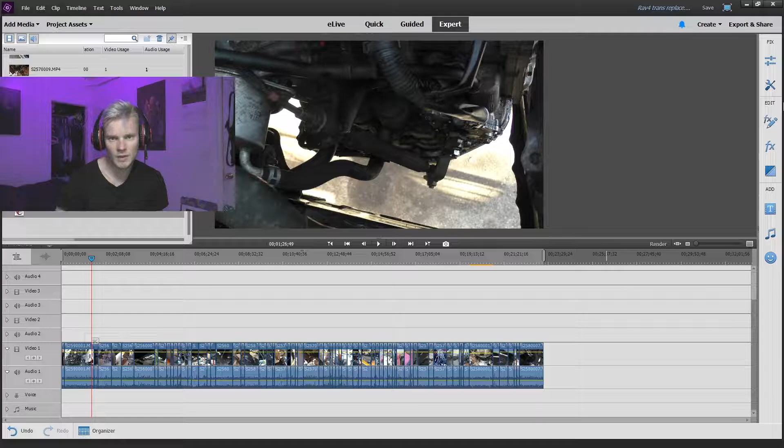So I'm going to be showing you how to replace the transmission. This is a 2008 Rav4. It's the 4-cylinder with the 2AZ-FE, the 2.4 liter, and mine is the 4-wheel drive version. So the reason I'm making an intro to this video is because I ran into some weird things because mine is 4-wheel drive, and I wanted to share those with you. You should definitely watch this before you just start taking your transmission out, because I actually wouldn't have even had to take my transmission out.

Anyway, what started to happen was it started to shift really rough, going from first to second and going from second to third. I want to say it was worse going from second to third. I can't remember. Can't be completely sure, but I think that was it. And it would only do it when the transmission got hot. When it was cold, it wouldn't really do it.

And I took it to a transmission repair shop. He drove it a little bit. He was like, yeah, for sure, it's a bad solenoid. I see it in these transmissions. This is what happens with them. I was talking about it to the place that I bought the transmission and the engine from for this, and he was like, yeah, if it's a problem going from second to third gear, it's the transmission. The transmission's bad.

So anyway, mine just had a bad solenoid, and what you actually can do if your solenoid is bad is you can just take the whole valve body. The valve body is the thing that's right underneath where the oil pan is on the bottom of the transmission, and there's going to be this big filter, and then the valve body is right under that. You can't just replace one solenoid. You want to replace the whole valve body.

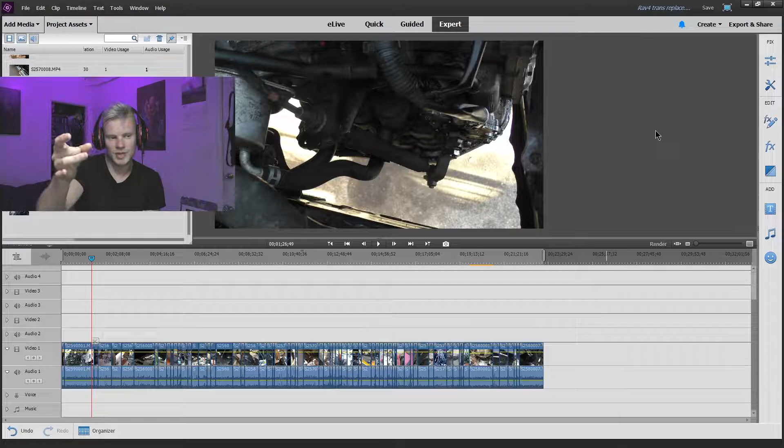And if the new valve body you put in doesn't work, you're going to have to reprogram the TCM, the transmission control module. But there's a little number stamped on the bottom of the valve body, I think the guy showed me, and if those match up, you should be fine. With mine, we just swapped in the other valve body and it just worked. We didn't have to reprogram the TCM or anything like that.

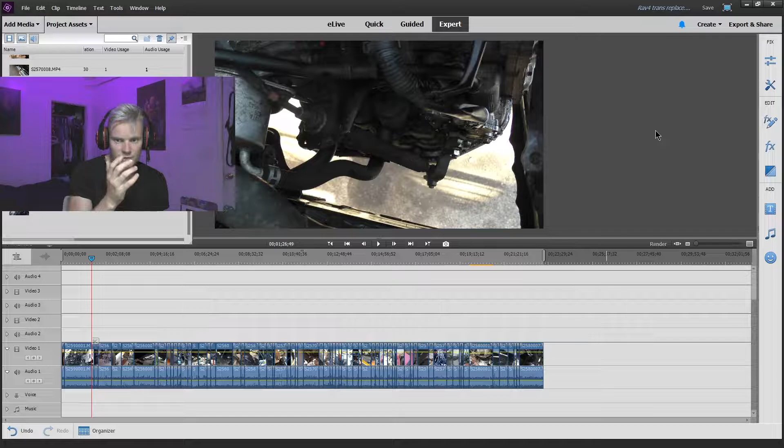But the reason we ended up swapping over the valve body was because the 4-wheel drive transmissions for the 4-cylinder are extremely expensive. I think they're just very rare. You'll spend like $1,700 for one that has way over 100,000 miles. The prices are ridiculous for these.

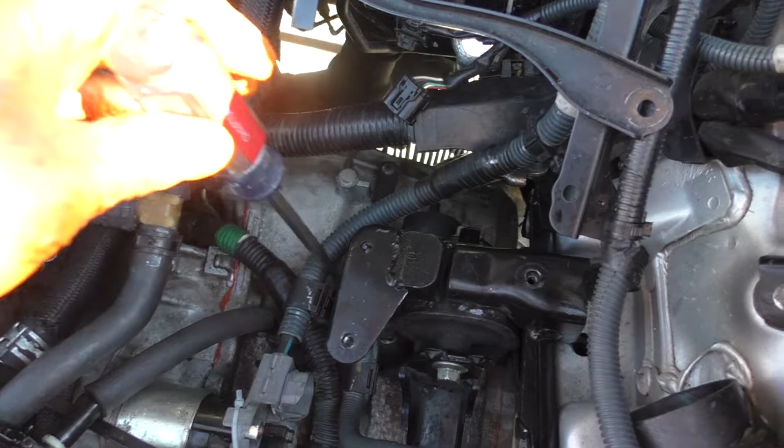This bolt here for this bracket holding on this. There's a little plastic clip that goes into this thing here on the dipstick. There's a bolt here holding in the dipstick. You just pull the dipstick out, and there's this going to the speed sensor, and these two parts of the wiring harness down here. And then there's two 12s holding on this bracket for the shift selector. You can just remove this 12mm bolt here, remove the shift selector.

There's two 12s here holding on the transmission cooler. There's one 12 back here holding on another bracket for the shift selector. And then there's just these two hoses down here. You can access them easier from the bottom. You need a couple clamps. You just pop those off the transmission going from the transmission cooler. And that's pretty much everything you need to remove up here on the top part of the transmission.

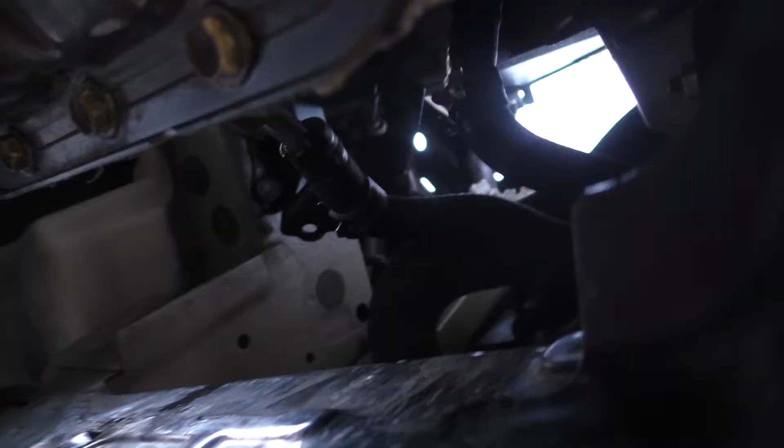Drain the transmission fluid and the front diff fluid right here. I think they call it the transfer case or something like that. I can't remember. So you've got to remove the axles on both sides. I haven't gotten the axles out yet, but I removed the wheels. Remove these bolts here.

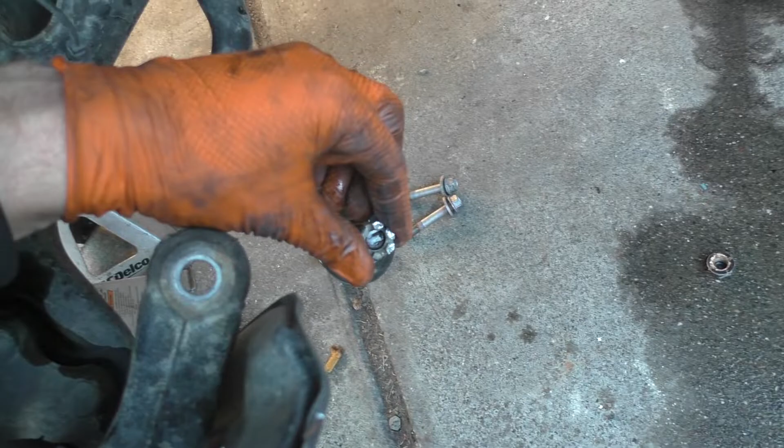Remove the ABS sensor, and you remove the brakes. Obviously I got the brakes just tied up here to the suspension. And then you have to remove the whole subframe. So you remove these. Basically you just pop this off. There's going to be a cotter pin you have to pull out, and then I just put this bolt down so the top of the bolt was flush with that, and whack it real hard with a hammer.

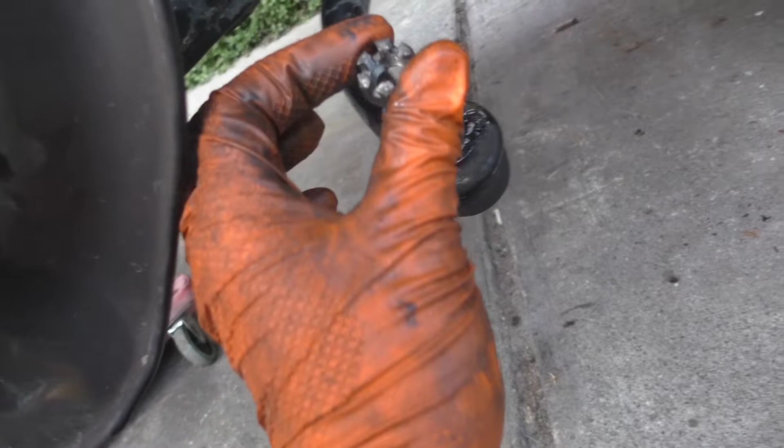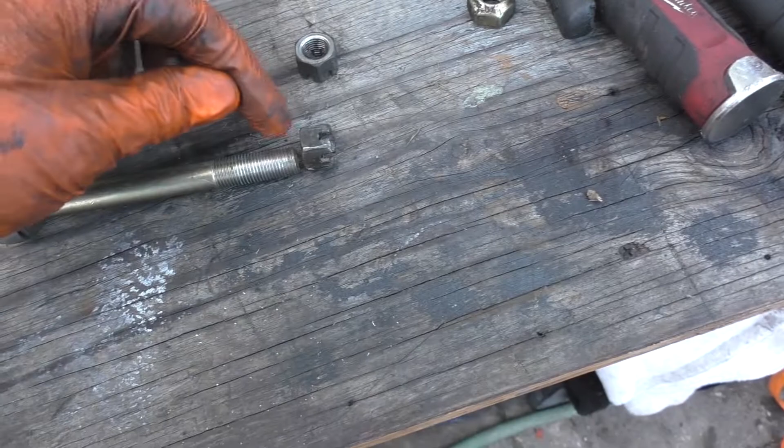So I actually had trouble getting these back on, and it's because if the bolt just doesn't thread on easily by hand, this will actually just spin. And I realized I messed up the very edge of the threads from hitting it with a hammer. But in order to fix that, I just took another bolt that it would spin onto, took my impact and spun it on and off a bunch of times to clean up the threads, and now it'll go on there easier. I can get it on with the impact. And then I remove this down here. If yours is stuck, you do the same thing with a hammer.

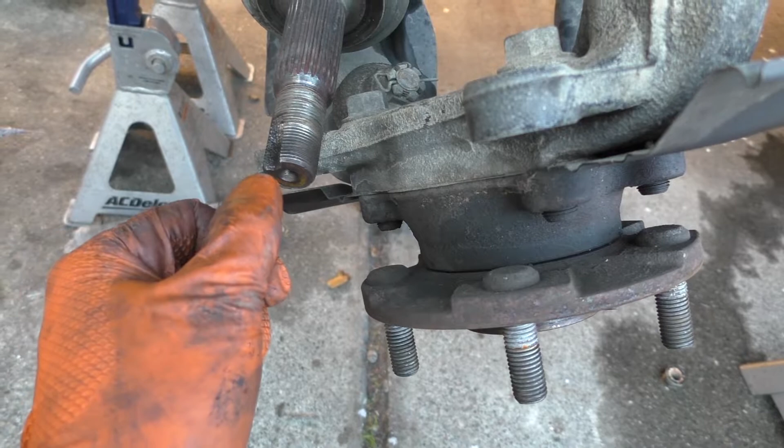And then the axle here, when you remove the big bolt on here, it's a 30mm, it has to be a 12-point socket. You have to bang a punch in here to get the dent out. And if you don't have a strong impact driver, I'd recommend getting one just for this job. It's going to help a lot. And then back there, you're going to have to wedge a pry bar in between the back of the axle and the transmission case.

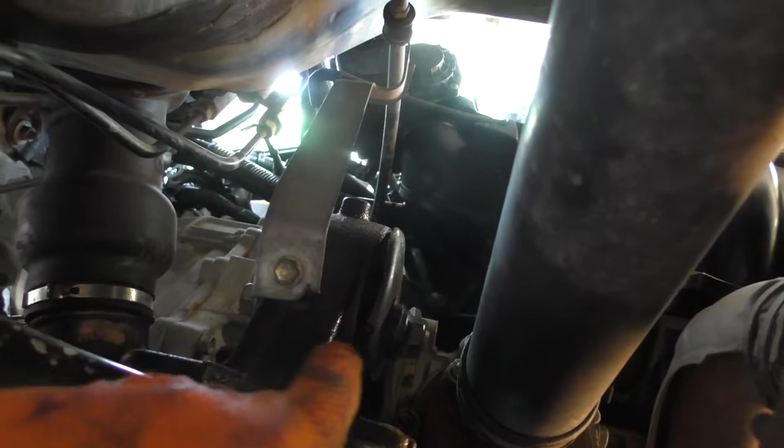I'm gonna finish taking the axles out after I move, because I need to remove the whole subframe. The transmission here, you gotta get all this out of the way, and this bar here from the subframe, to drop the transmission out of the bottom. So right now I'm working on removing this whole subframe. There's a nut on the bottom of this. This holds the subframe to the steering rack here. There's another one on this side. This rear engine mount here, transmission mount, it's really bolted to the transmission. There's going to be 2 nuts in here, and then 2 bolts right here. Remove those.

And then to remove the subframe, there's only this one out of the 4 engine mounts that's connected to the subframe, but I put these jack stands under the transmission right here just to be safe. You could also support it from above, obviously. If you do need to use a cheater bar, remember the best cheater bar is just the handle off of your jack. I have a pretty small impact, so I need to use a cheater bar for that one bolt. I've got my floor jack under it with a big board, pretty much the perfect size actually.

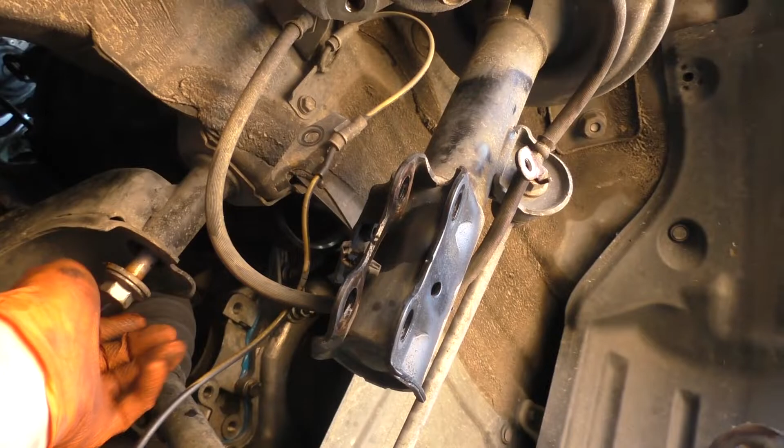I'm just going to try to remove it all in one piece. I'm just going to leave this stuff on it. I'm going to remove this with it, I think. Or maybe not this one, but at least the one on the other side, you have to pull the transmission down. And there's just a bunch of 17, 19 millimeter bolts. So there's this here, that long bolt there, and then 2 nuts there. And then there's this bolt right here. Looks like rusty water coming out of it or something. And then I just remove these 2 bolts

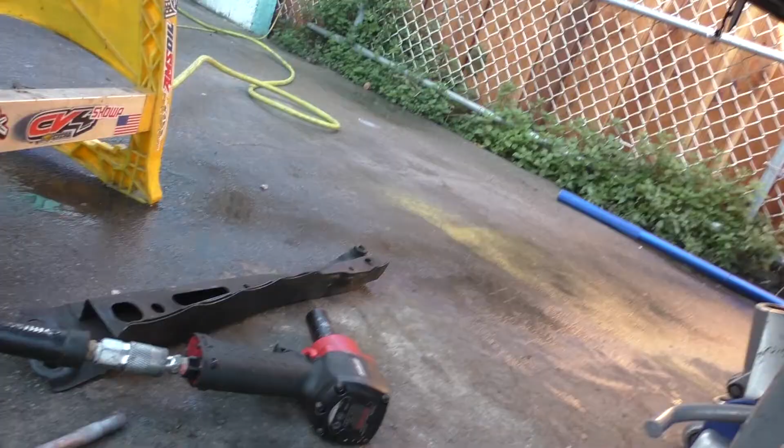right here. And on this side you gotta remove this piece, these 2 long bolts. Right there, right here, 17 millimeter. I was actually just using a ratchet on the top part here, but then I realized that this hole is here, so you can just bring a ratchet down to the bottom, which will be easier, or just use an impact. And that's everything there. It's actually way easier than I thought it was going to be.

I'd recommend removing these bolts that hold the steering column on first, because the one on the other side here is getting stuck, as you can see right there. And when you're lowering it, just lower it a little bit and then make sure nothing is sticking to it so you don't rip anything off the car. Before I drop this thing down, I'm just gonna go ahead and get all these bolts out of the way.

Yeah. So I'm going to slowly let this sucker drop. I'm sure it's real heavy. Oop, slower.

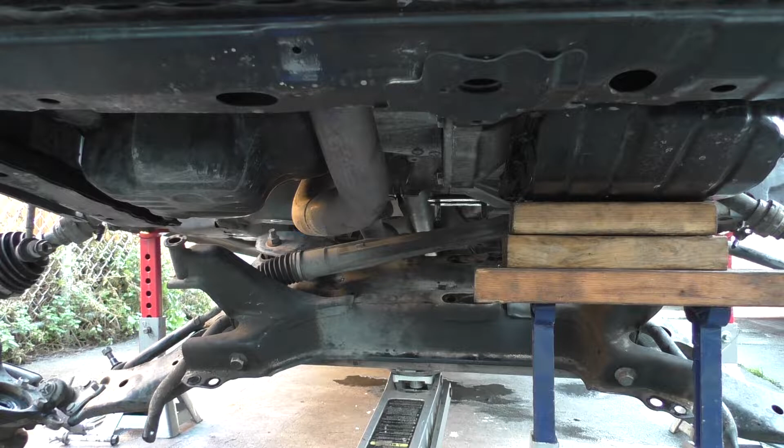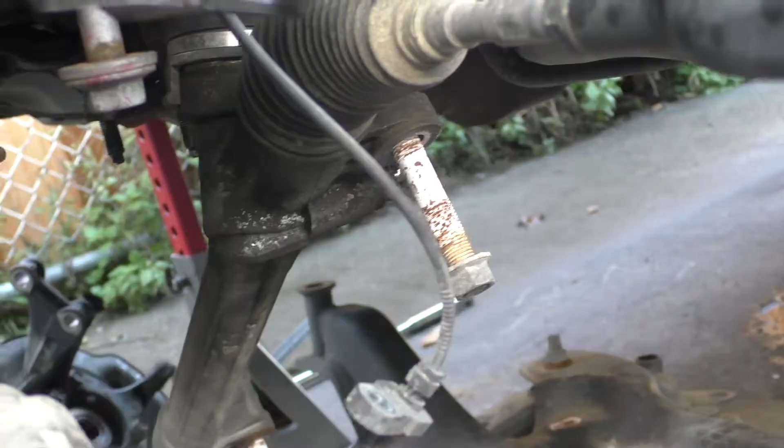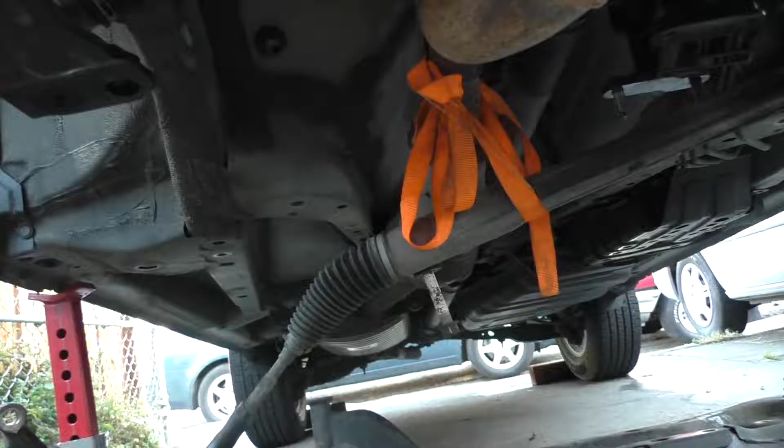Just make sure to move the steering rack over. What I like to do with whatever bolts I can is just rest them in the spot where they came out and save them there for later, then you can't mix them up. I just tied up that steering rack a little bit to get it out of the way. As you can see, there's way more room to get the axles out now. Definitely recommend just dropping the subframe first.

Passenger side one here is this mount here, and it should just be able to pull out of the mount. I think there's this bolt on the bottom, probably need to loosen that up, and then there's this retaining clip here. You need to squeeze these with pliers and then bring that forward. It looks like, yeah, it'll pop forward once you squeeze it enough.

You could also just take the whole mount off. There's just 3 bolts. There's 1 on the bottom, right here, and there's 2 on the top. The 2 on the top you can get with a power tool, I think. The 1 on the bottom's harder. Then you can just use a pry bar, or you can hit the edge here with a block of wood and a hammer, and it should pop out of the diff.

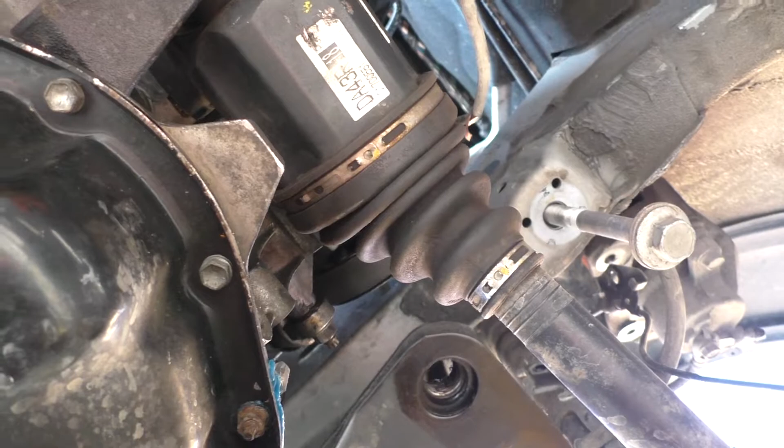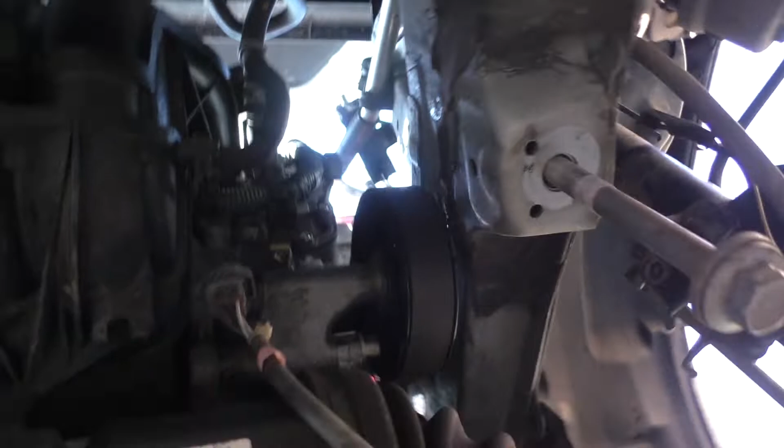I can't really get this axle off at all, but I would recommend just disconnecting the mount here with those 3 bolts. What I'm gonna do is just take the piece of the exhaust off here. There's just a joint there and a joint here. I'm gonna take that off, and then take the transmission off with this axle on it, and worry about getting the axle off after I get the transmission out. It's all 14mm bolts, 2 of them on each joint. I just forgot to disconnect the wiring right there where the O2 sensor is connected.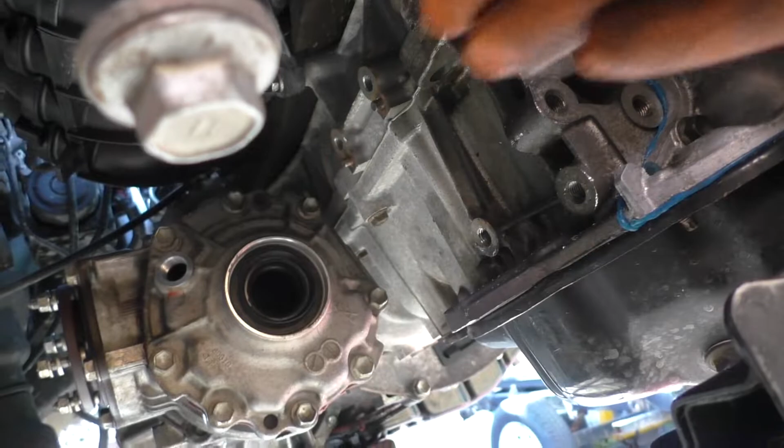I just realized since I took the axle out after I dropped the transmission and didn't take the mount off, you actually cannot get the axle back into the diff with the mount on it. So if you did it like me and just dropped the transmission with the axle still in the mount, I'd recommend putting the axle into that diff before you lift up the transmission. Because when you lift it up, with that mount on it, I can't get it in there. So now I need to take the mount off.

And the one on this side, now there's a ton of room around it, where before you could only get a pry around this little hole here, and you just need to pry it away from this. This is a shield here, so you probably want to pry along this here and not along this thin metal, because you'll damage it, as you can see right there.

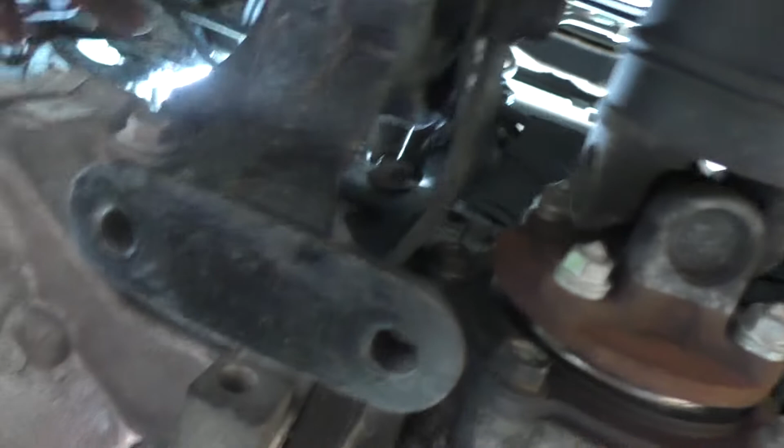Then you gotta remove this engine mount. There's a nut and a bolt that go through the center. You pull that out. And then it looks like there's 3 mounting bolts that you can take the bracket off with. Or you could also just leave the bracket on and take it off after you drop the transmission. Oh yeah, and don't forget to remove this 10mm bolt first to get that bracket off the mount.

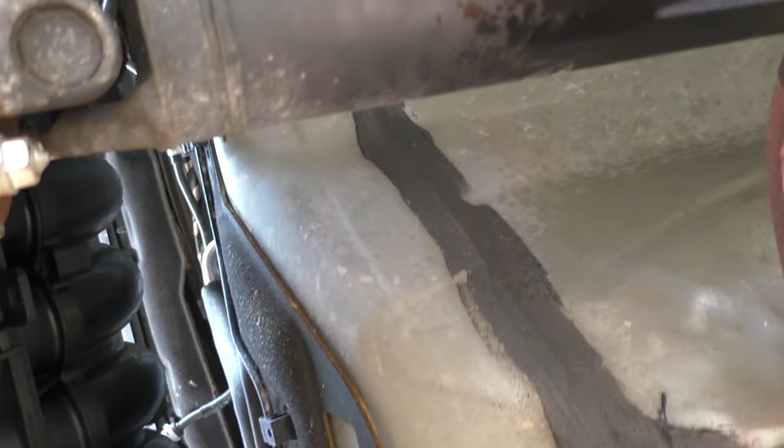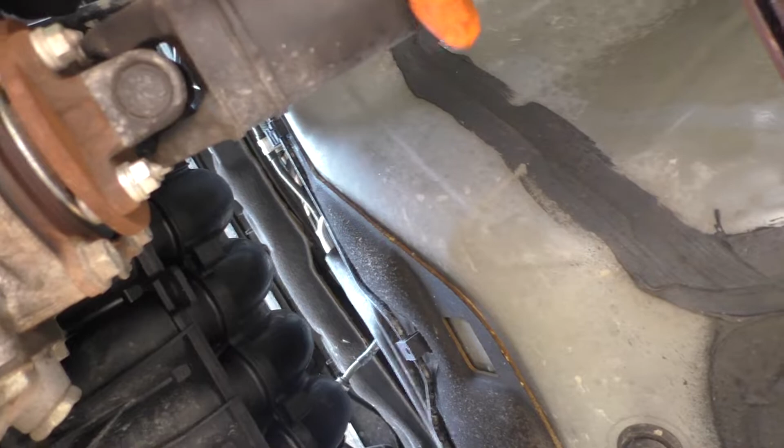I'm gonna get the drive shaft out. Toyota actually calls it the propeller shaft, this the drive shaft, and the other one the axle, but you know, it's a drive shaft. Basically, you just remove these 4 bolts here. Let's see, can you spin it around to get all of them? I think if I put it in neutral, I might be able to spin this around by hand. So you just remove these 4.

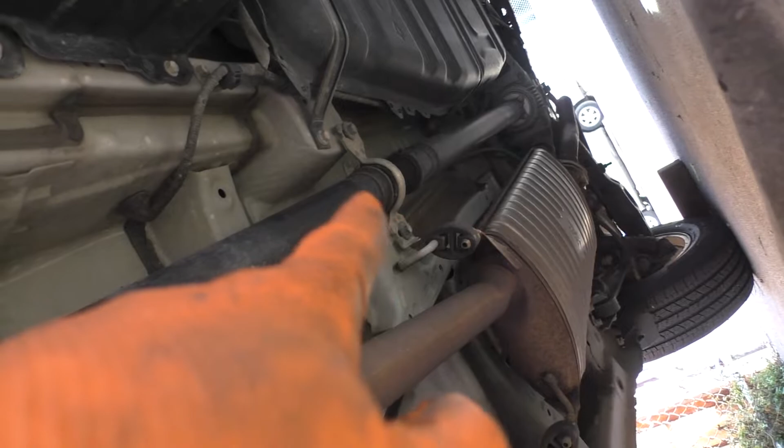Remove those 2 bolts down there holding that clamp, and then there'll be a joint in the middle. It'll come down, and then you can just pull this end out. You might as well take this mounting bracket off first. That goes right here. Give yourself a little more room to access these. Just 3 14mm.

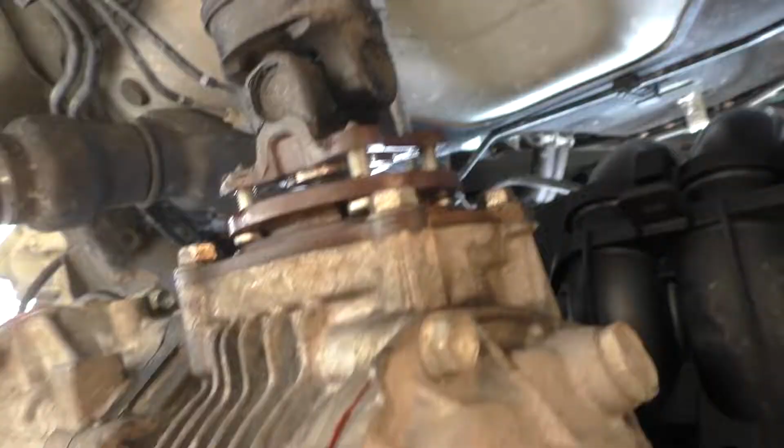Putting it in neutral did not allow me to turn that. Not sure, there might be a way to get it to turn by hand. I set it up like this to 12mm on my impact, and I was able to just barely get that bolt on there and just zap them off. You can see where it separates. Mine didn't want to separate, so I just stuck a screwdriver in there and just hit it with a hammer

until it popped loose. The owner's manual did say when taking off or storing it, I think it said joint number 2, pretty sure that means the middle joint, not to let it exceed 20 degrees. So just to be safe I'm propping it up so it's not at that sharp angle just sitting there all the time, because it might damage it. You might want to take this end and just pull it over there so these don't hit the end of this when you're dropping it down.

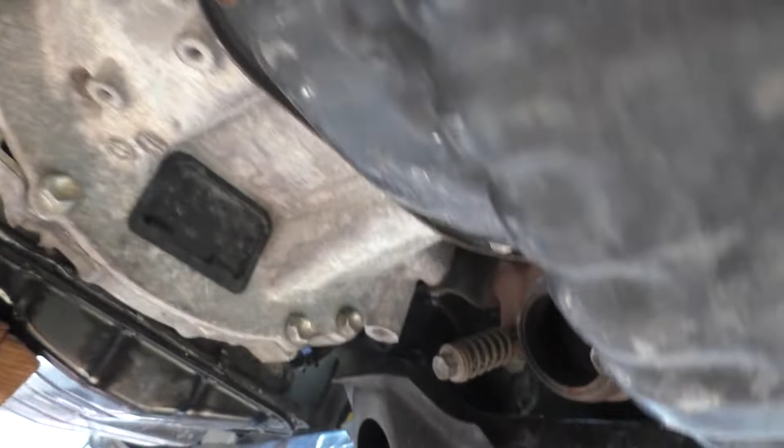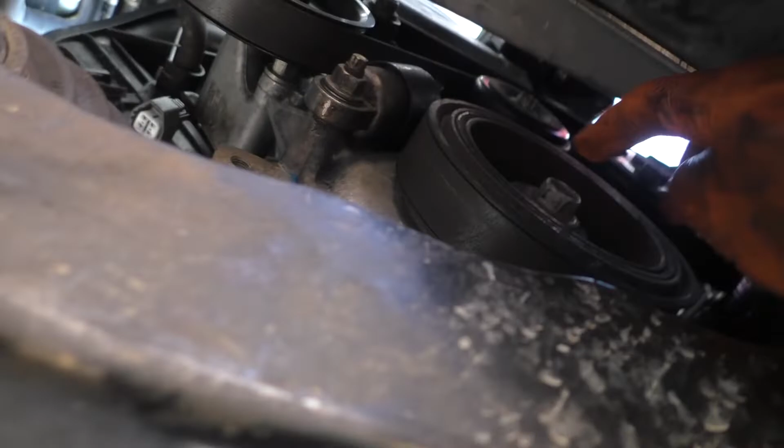Next I'm going to go ahead and remove this. I'm basically just going to remove all the extra bolts that I need to do under this first. Now there's a bunch of bolts in here. It's a 17mm on the crank bolt, spin the engine clockwise until you remove all of these. And then mine has 4 bolts down here. I think the 2-wheel drive one might just have 3 bolts. So there's 4 down here. I'm going to remove those 2.

When you're turning this around, you want to leave the bolt right on the edge there, because when you go to loosen that, this is going to turn that way, and then the ratchet's going to hit up against this, so it'll be stuck up against there. Some of the other bolts that bolt the bell housing to the engine might be easier to reach from below too. You can see one right here, and then there's another one right there.

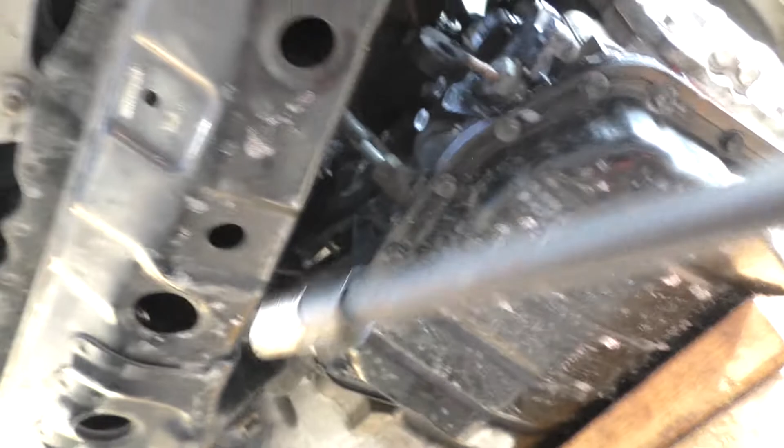Another one that's easier to reach from the bottom is this one down here. You might want to wait till you get this mount out of the way first, it's up to you. And actually you can just zap that thing out. Use a real long extension, makes it a lot easier. Also one right down here, I believe, it's a 17 millimeter bolt. Should be able to zap that one out from the side, same as the other one. This one I was not able to zap out from the side like the other one. Makes the extension at too much of an angle.

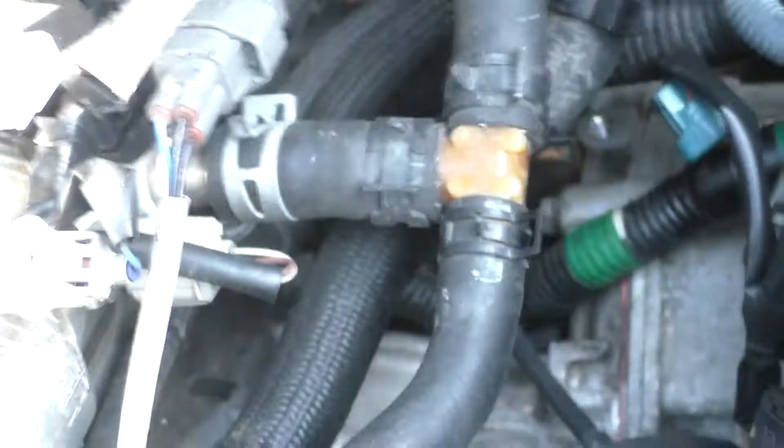So now there's just two more on the top. One right here, and one back there under this stuff. You'll see it. They're both the bigger 17 millimeter ones. And then it should just be able to get those two and then remove the front engine mount and then the driver's side one right here, and then I believe it should be free. So just make sure you have it all jacked up good with what you're going to lower it with before you take all those off.

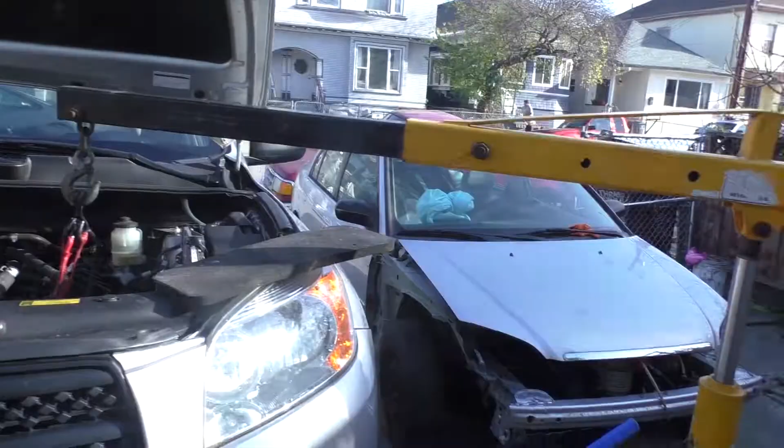I decided to use my cherry picker, put a strap around that end of it, and then I'm going to take this top mount off here, put this bolt back in, and then put a chain around this part right here. And I'm going to take this whole mount off. It's 14 millimeter, and you've got to hold the nut on one side, and then there's 4 17 millimeters on both of these sides here.

Just stick my jack under that side of the transmission, and then move these jack stands over to the engine. It's probably better to have it over on that side of the engine, since the only engine mount is over on the passenger side. But thing is, I think if I have the jacks here, it might kind of get away trying to lower this down and put it on something. So put it over there for now. We'll see. I've still got the jack and everything.

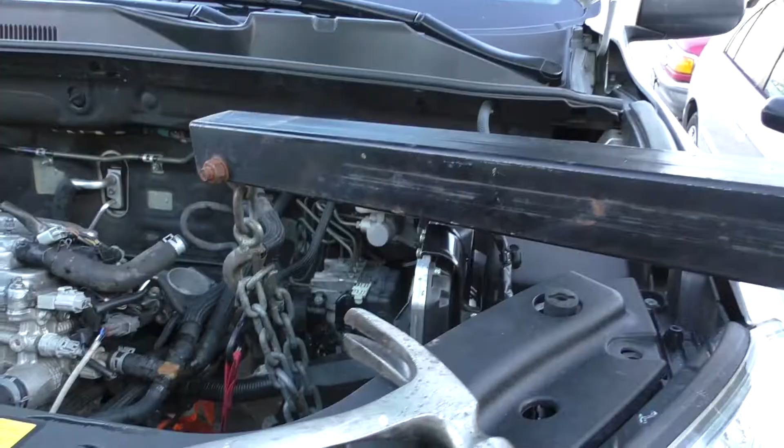Jack the transmission up just slightly, like an inch or two. If you jack it up the right height, this bolt here will just slide out really easy. And then setting up an extension like this will allow you to get to that without having to use a wrench. And if you're using the hoist like me, I didn't think this through, didn't make these long enough.

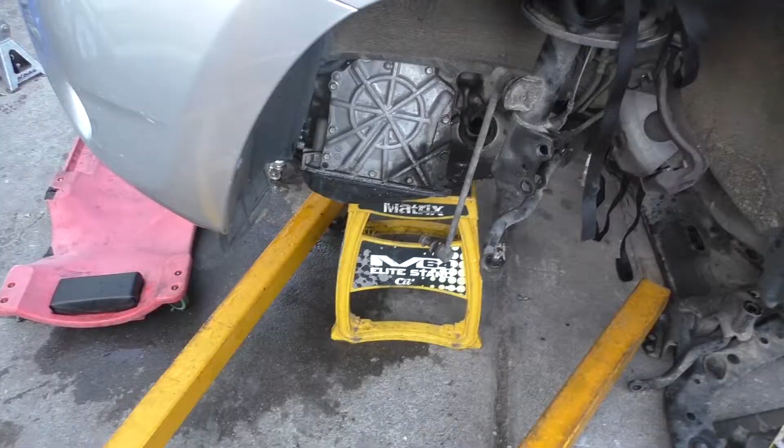Now when I'm lowering it, the arm is running into this right here. So if you run into that problem, you just need something to set the transmission down on, and then just redo your chains or straps on top or whatever, make them longer. Alright, now I got this set up.

I can get those 2 bolts on the bell housing off, and then that other engine mount over there, and then I think it should be free. One back there you can reach with a ratchet and a pretty decent extension. The one that is right, where is it? Right here, you basically just have to get with a wrench.

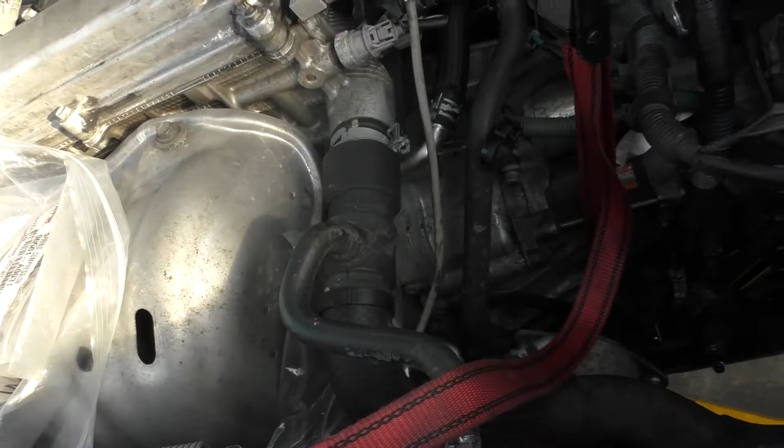Front engine mount, there's 2 17 millimeters here holding it to the radiator support. And a 19 millimeter right there going through the center of the mount. Mount up and over the side, and then pull it down. Pull it down right here, and then the nut on the end of this one actually holds in place. You don't need a wrench, which is nice.

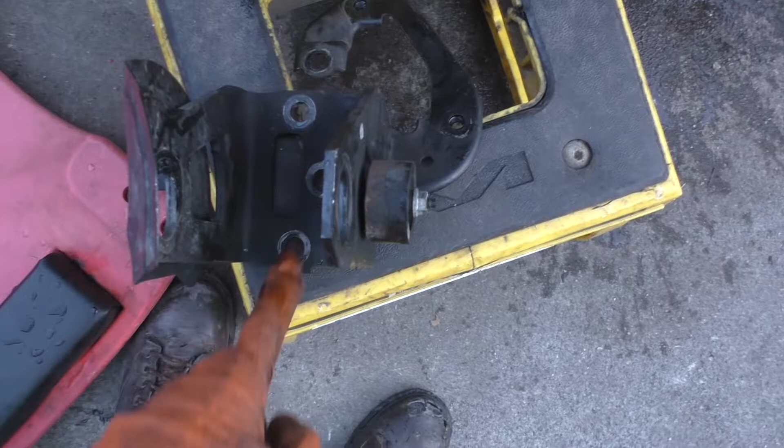And then it looks like there's 3 14 millimeters holding that bracket on there. Just gonna need to get that bracket off, and then after that should be able to drop the transmission down. So yeah, the bolt on top is easiest to go from the top of the car. And then these 2 I did from the bottom. This one is a freaking bitch to get out because you have no room.

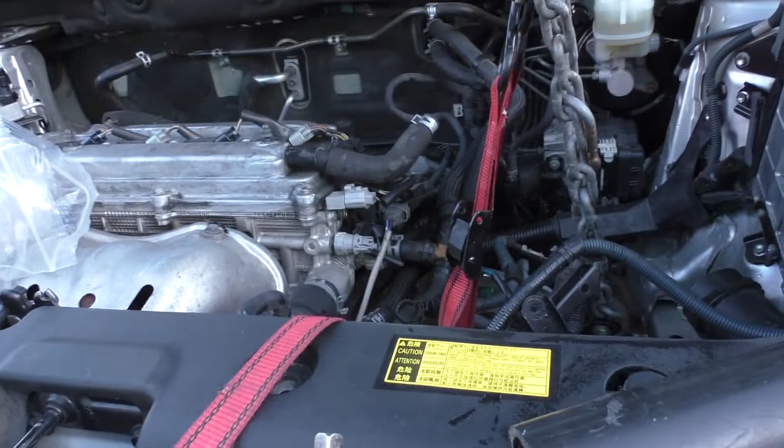I used this with just the short socket on it, and then also used, where is it? I also used this 14 millimeter ratcheting wrench, and then I had to put the pipes on it as a cheater bar to pop them loose. They're pretty tight. One trick you can do that made it a lot easier to take that bracket out is you could push the whole engine and transmission towards the back of the car and hold it there to give yourself more room to stick your tools up there in your hand.

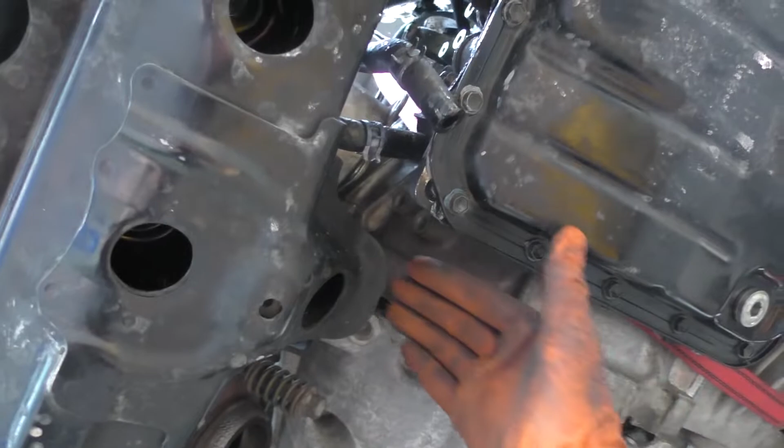You can see the engine and transmission are already separated on the bottom there, but top is still together. There's 2 dowel pins. There's one around here and then one kind of back there, sort of on top, that go into the engine and transmission, and they're about maybe a centimeter or so. You have to get them separated before it'll break free of those dowel pins. What you can do is put some pry bars in there and just keep banging with a hammer bigger and bigger pry bars in between there until they get completely separated.

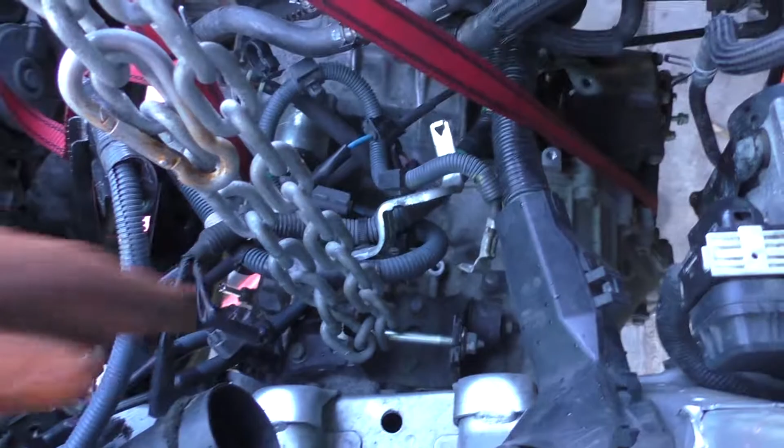I decided to put the jack under the engine actually so I could raise and lower it. So what I did is raise the engine up a tiny bit there, lowered this way down, and actually all I did was hammer this in right there, and it just popped loose super easy. And as you're lowering it, you just want to lower it really slow and just keep double checking that nothing's snagging it up and that you actually got everything off of it.

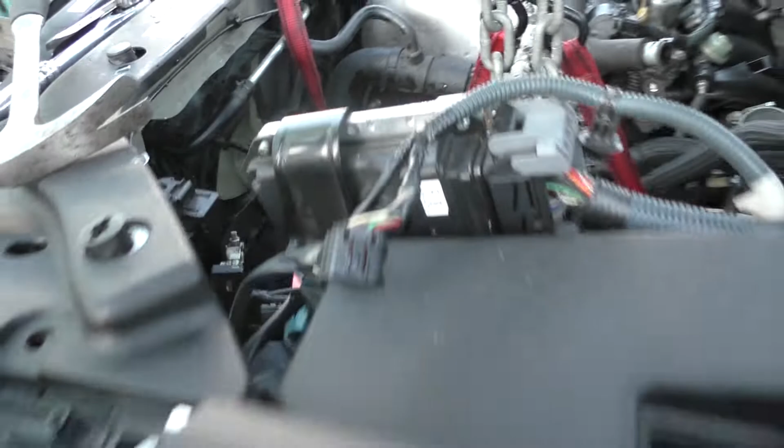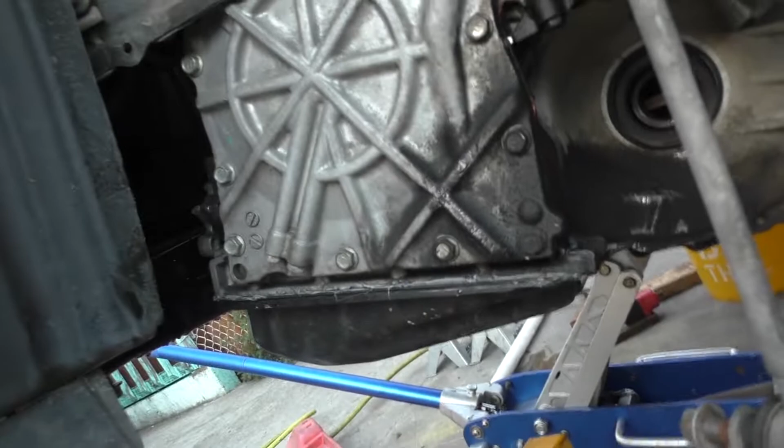You look out for all these, like the wiring harness, the coolant hoses, the bracket over there. And with that axle, it's still attached to it. The mount on it should just kind of pivot and spin up as you lower it. That's what happened when I pulled the engine out of the top of it. So that thing shouldn't be anything to worry about, but check that too. Just double check everything. Lower it really slowly.

Here we go. I had this little cradle I made for the engine before. I put it on a skateboard. Obviously, a dolly would be more ideal, but this will work. And then to keep it from tipping over, just put a 2x4 on one side of it.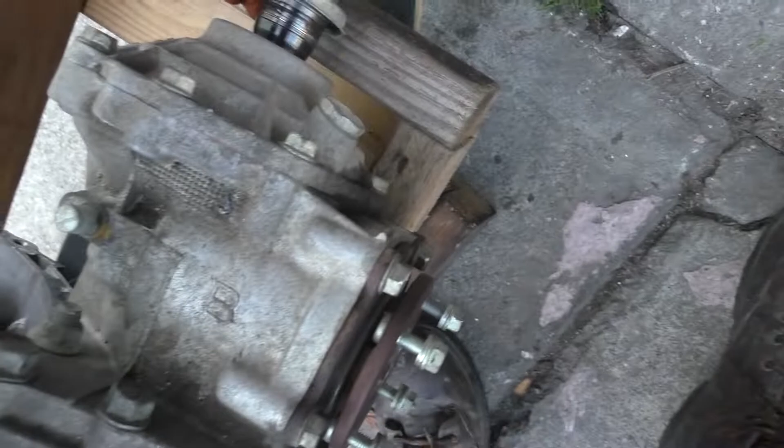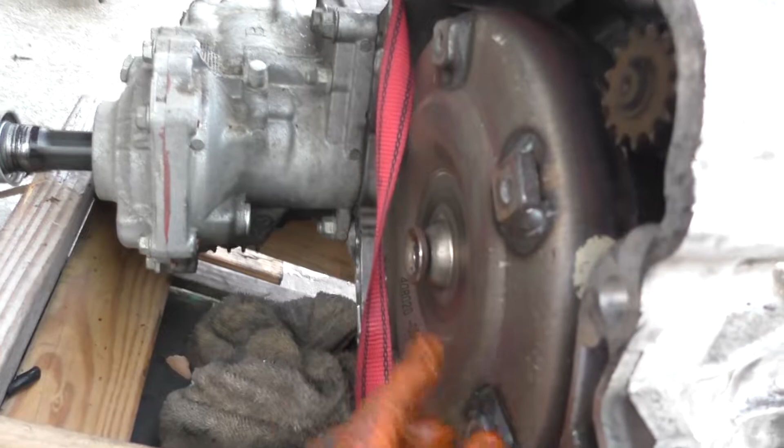I'm gonna see if I can get this fucking axle out. Now it's coming out pretty easy. I'm sticking a piece of wood and just smacking it with a hammer. It's almost out, I think. And then just remember the torque converter can fall out. Mine was falling out. I was hitting it with a hammer, and a bunch of fluid will drip everywhere.

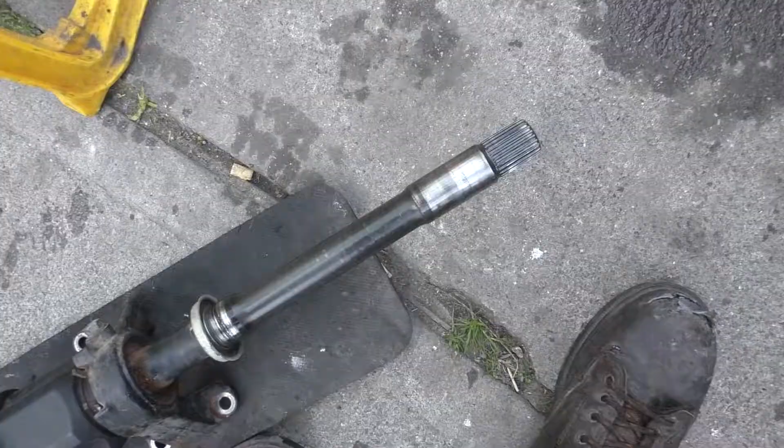I mean, it's not a big deal if you're replacing it. I don't know if it'll hurt it if it falls, but there's probably one reason why it's hard to get out. This one is just like a lot of it is inside of that diff, but definitely just easier to get it off after you drop the transmission.

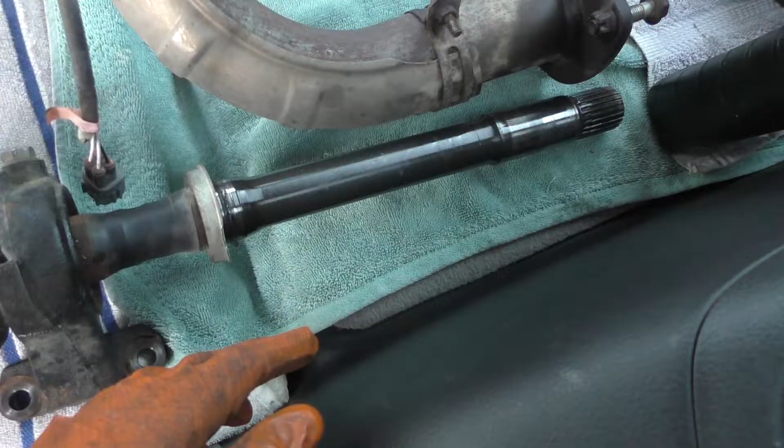I think it takes like 2 seconds to take off that piece of the exhaust. So as you can see now, I was surprised this whole piece here goes into that diff, because I guess this isn't really attached to the diff at all, because the diff I think probably controls the front to back wheels with the 4-wheel drive. So when you're taking it out, a lot of it has to come out before you get this thing out of there. So just some quick tips for when you're putting it back together.

I had a really hard time lining up the transmission with the engine. You just kind of have to mess around with it, just kind of get it to line up right, watch, see if it's catching on stuff. It took me a while, but you might get more lucky. Probably help if you have 2 jacks too. You could jack the engine, jack the transmission.

It can be hard to get the transmission straight, but as long as you just get it lined up, or you can get 1 bolt in, just search for a spot where you can get 1 of these bell housing bolts in, tighten that up a bit. If you can get 1 in, you're pretty much good.

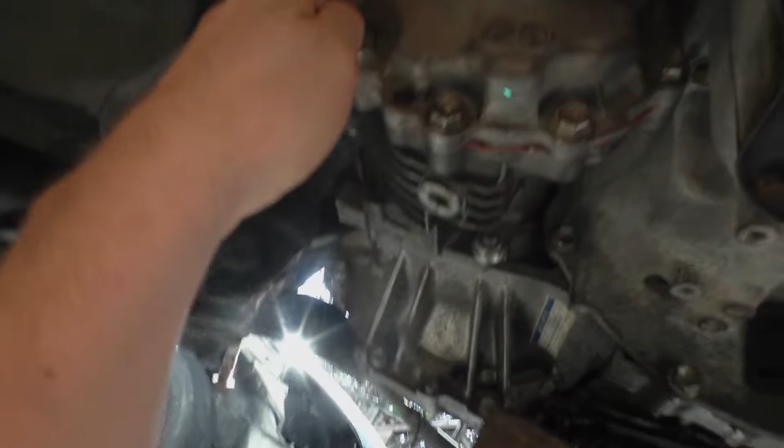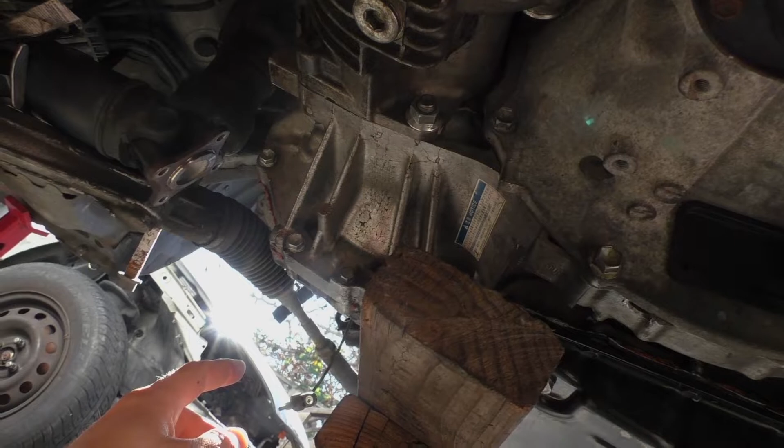And some stuff I'd recommend doing before you put the subframe back on. I'm gonna go ahead and fill this back up before I put the subframe back on, and then put the axles on before I fill this up, so the fluid just doesn't fall out. It takes a half a liter, like half a quart. And also going to make sure I bolt on the axle mount before I put the subframe on. That should be easier to do that first also.

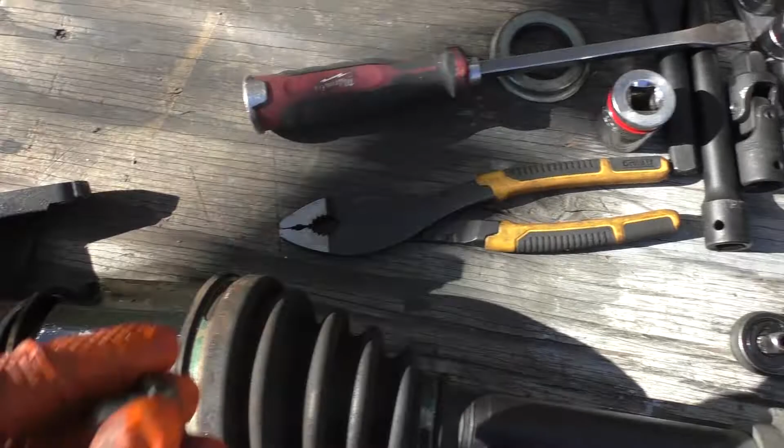Oh yeah, and there's a bolt that goes in right here on that mounting bracket, and then this clip right here, you gotta squeeze it with a pair of pliers and then just pop it out that way. And now I can just mount this on the engine first and then slide the axle in.

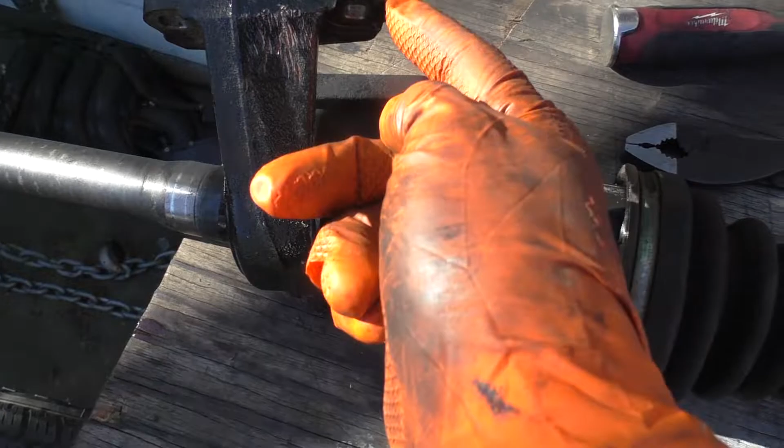Now if you do need to remove this, mine actually wasn't too hard, but it gets rusty in there, as you can see. Squirted a bunch of WD-40 in, and then I just whacked these ends of the bracket here really hard with a hammer, and it came off. It actually wasn't too hard, it just took a minute or two, but yours could be much harder. I would just recommend putting this in the transmission first and then just raising it that way.

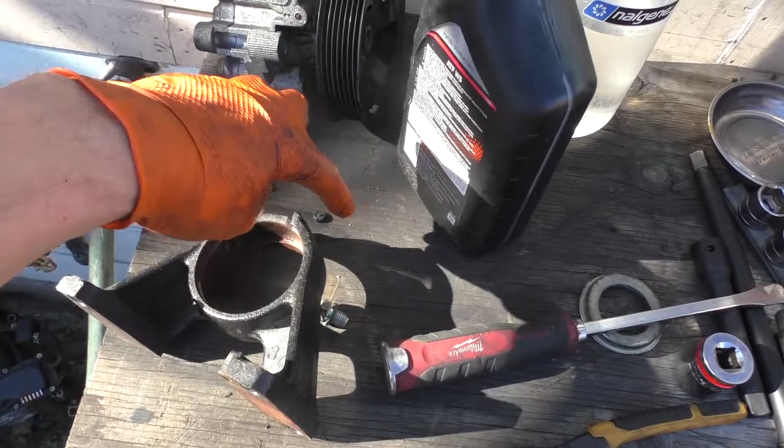And then when you install it back, I'd recommend, so it's easier to get out next time, you can just take some anti-seize and coat the inside of this, and that should keep the rust from sticking it together next time. And also, if it's really hard to get out, you could heat this up with a blowtorch first too. That should make it a lot easier. Easiest way to put oil into the diff is just get a hose that fits in there, bring it up to the top, and then put a funnel in the hose.

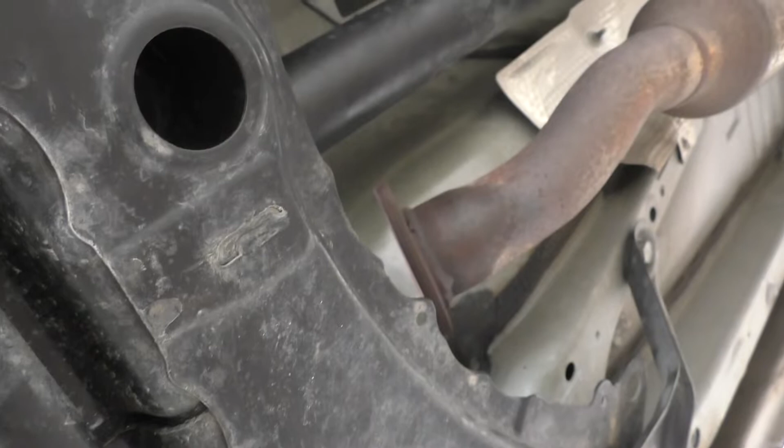And I actually forgot to put this exhaust thing on first. It's probably slightly easier to put it on before the subframe, but I don't think it's a big deal. So when you put the subframe on, if you just get one person to help you, it's really easy. I put the rear engine mount and the bracket on the motor first. So I put the bracket on and then just put the mount on it before I put the subframe on.

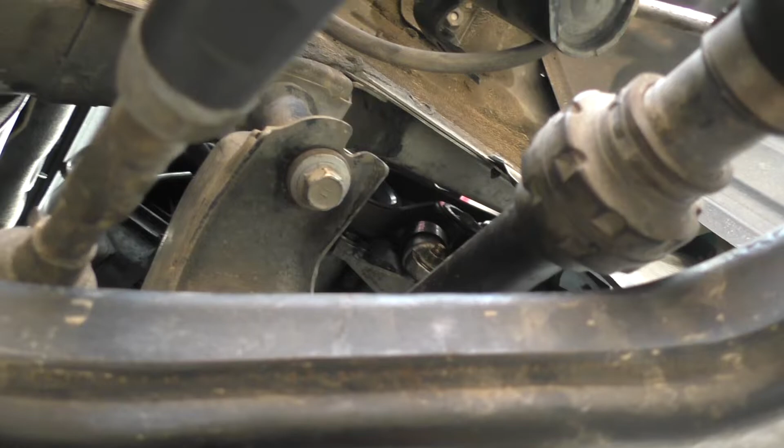Then basically you just kind of jack it up, if you have one other person help you balance it. And then I just got these 2 bolts in by hand first. Just get all the bolts in by hand before you start tightening down all the way. Basically these things go like this, and the long bolt is there. These are 2 short bolts and the long ones. I had to push this part forward to get these to line up, so just leave everything loose first.

And there's these 2 bolts here, and then 2 nuts for the engine mount. And there's these long ones with a nut on the bottom that connect the steering rack to the subframe. Still need to tighten those. And yeah, that's pretty much it right there. It's super easy if you have somebody helping you.